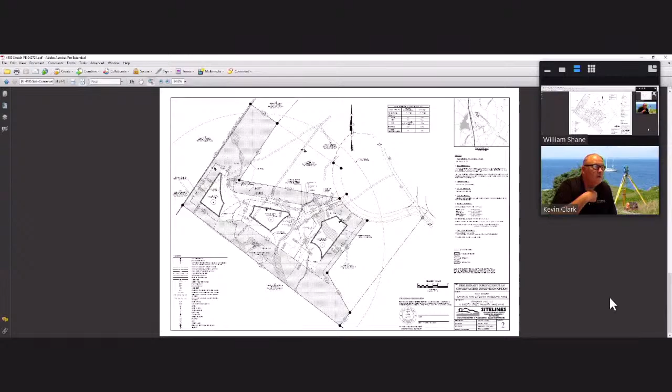Excuse me, is that going out over Channel 2? That's what I was just asking Christina. Hold on one second. Sure thing, use that screen for the person displaying at the podium, and we use this screen for Zoom. It is, but is it going out on Channel 2, not Zoom? It should be. Do you want me to try to turn that television on? Yeah, I think that's what Bill Shane does. Yeah, thank you for broadcasting.

Okay, thank you. All right then, so moving forward now, we prepared the conservation style subdivision plan for the next level with the revisions. As you can see, we added, in addition to the 75-foot buffer around the perimeter, open space around the perimeter that equals 6.39 acres of open space.

There would be 3 lots, which we had to modify so that they gain frontage on this private right-of-way coming off from Blanchard Road extension. We did submit road names, one of which has been approved, one was declined as being too close to another name, so we are resubmitting for another road name, and we'll have those straightened out before we go to final.

And when you say an agreement is in place, who is the agreement in place with? I believe there was some previous discussions with the town regarding that, and it was prior to my involvement in the property. I don't know the specifics, but I know that Mr. Ross is intending that he needs to do some improvements to the gravel portion of the road.

Hopefully at the preliminary we'll have more detail for everyone that lives there regarding the roads. But is it possible to get involved in discussing the actual standard? I mean, there's paved and there's gravel, and I think that's an important discussion to be a part of. I think at the next public hearing on this project, that would be the appropriate time. Okay, I believe so. Yeah, thank you.

I just wanted to add that if I'm understanding the situation correctly, the road you're concerned about is not the actual subdivision road. It's a road leading to where the subdivision road comes off, which is what Chase owns. So the planning board, I don't think is really going to have authority to look at that, but I would be very willing, especially since Kevin talked about an agreement with the town, to have the town manager and you and I sit down — it sounds like it's a town issue. If it's a private road, what are the deficiencies, and what, if anything, can the town do to remedy them? And if there's been an agreement between the owner of the subdivision and other people who have this concern, that will happen too.

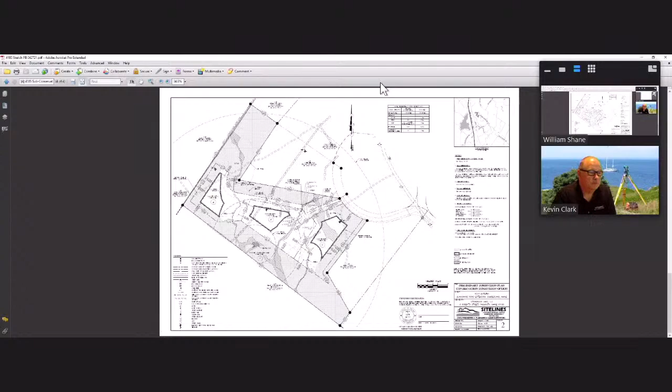If I could, on the road issue as well — at the last meeting, there was a question of whether the existing association would be responsible for the new private roadway. My understanding is that the maintenance of the road associated with this project would not fall under that; although these lot owners would need to be a member of that association, there would have to be an additional road maintenance agreement in place for these three lots that does not fall on the other lot owners along the Blanchard Road extension. Okay, thank you.

Anyone else in the room? The public hearing's still open. So currently there's nobody in the queue, correct? Currently, no hands raised. Okay, we'll wait just a short while longer. Again, if somebody at home wants to make a comment, please do it now before we close the public hearing.

Okay, I think at this time I will close the public hearing and bring it back to the board. Are there additional comments or questions?

Josh: I was looking at this for the next subdivision review. Ordinance 25037G states walkways shall be provided along all roads within a proposed subdivision.

I don't know if that road is within the subdivision or not. So while you're talking about roads, that may be something we need clarity on. It's there to serve that subdivision, but I don't know if it's actually within it—it may be an easement across the owner's other property. The rest of the roads are driveways, which wouldn't be subject to that standard. I'm not sure if that standard would apply.

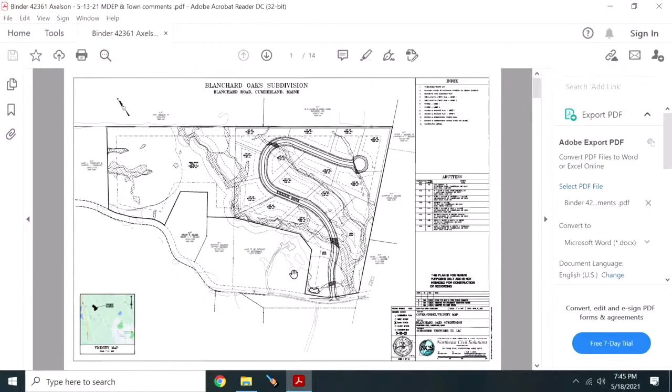So what we're looking at is 13 house lots that would be private. They are on wells and septics. Electricity obviously is going to be buried.

We're looking at a minimal impact of wetland crossings. There's one right here, and then one up in this particular area. These are just wetland swales in here. This is actually classified as a stream right through this area, and then it comes down into the Stone Gate and toward the West Branch areas that are on the other side of Blanchard Road. We have the requisite buffers and setbacks, so we're not going anywhere near those. Gorrill Palmer did the reviewing for us, and they came up with a list of criteria.

You probably have that list before you. We have addressed all of those criteria, and the town has the revised plan set, so they'll certainly be able to take a look at that for the final. We've been able to address every item in there. Some were simply comments, others were suggestions, and obviously we'll open that up when we get to the board's comments. I'd be happy to address anything toward that end.

The waivers we are looking at would be for identification of trees over 10-inch caliper. This 40-plus acre site is fairly wooded -- I wouldn't call it old growth necessarily, but it has not been developed, so there are quite a number of forested areas in there. We'd like to keep those as much as possible, particularly in the conservation open space area that would be with the homeowners association. We'd rather not have to identify all those trees, because there's literally a veritable forest of trees in that area. The high-intensity soils maps and boundaries, we'd like a waiver of that as well.

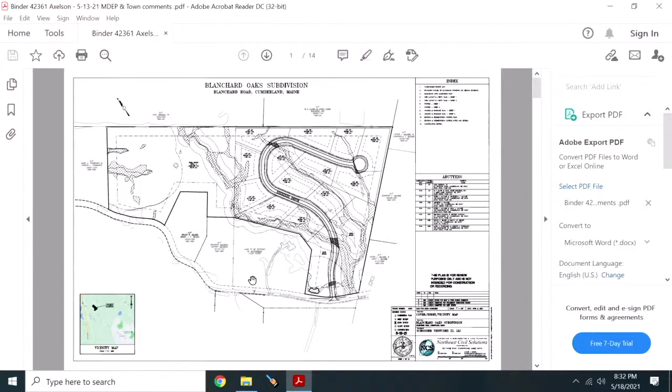Okay, thank you Jim. Josh, do you have road detail in the plan? Is there a road detail in the plan? Yes, in the plan set. Do you know off the top of your head what the width of the road is, and do you have shoulders? Yes, I believe it's 20 feet with 2-foot shoulders.

On both sides or one? I thought it was 22 feet. It's 20 feet of paved road with 2 feet of gravel shoulder on both sides, so a total of 4 feet of gravel. It is actually in here.

So it sounds to me, and this is not just for planning purposes, that we're pretty evenly divided. I certainly could go either way, especially now hearing the width and the shoulders. I know a number of subdivisions - I have a daughter who lives in a subdivision on Autumn Ridge that has sidewalks, but they're not plowed in the winter, and there's a lot of work because of the gully next to them. West Branch, partway maybe, so it's pretty heterogeneous, it seems.

So I guess, from your perspective, would you want to see a vote tonight on that for design purposes, or would you just as soon go to the final? That's a loaded question, I know it is. Because that's kind of why I brought it up in the first place, to see where we are as a board. Again, it sounds to me like it would be 4-3 not needing it, but I'm not sure, it might even be 5-2.

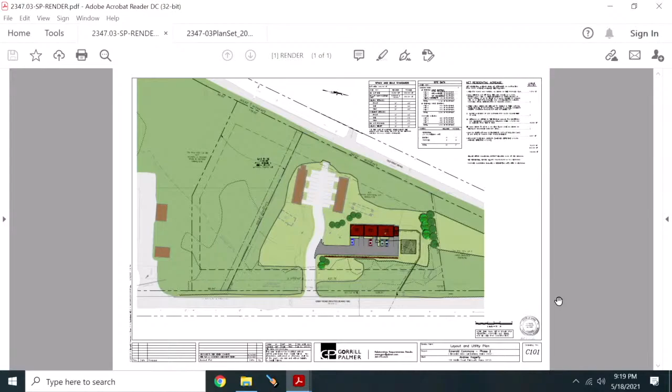I would, if this is okay with... could you, thanks, Dan. It's worked out well both times. We should have engineers all the time. Al and I are going to get some banjos, and we'll just keep playing back and forth.

No, I did get a chance to review the letter from Al that was submitted on Friday afternoon with his comment response, and everything he responded to was acceptable in my mind. And when it comes to the waiver for the high intensity soil survey, we would support that given the low density of development out here.

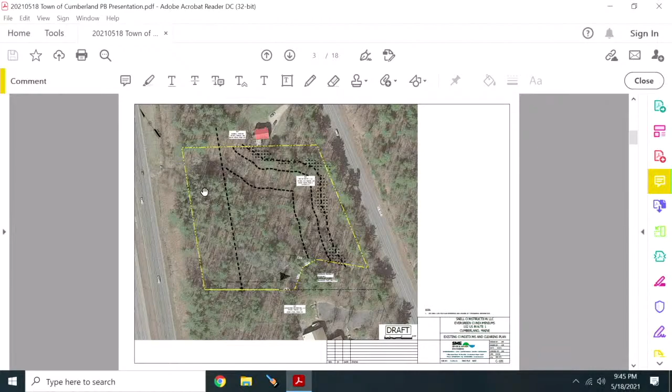We also have a 30-foot elevation drop from right around here to the beautification strip, which is a real challenge - we'll get into that in more detail later in the process. Anyway, it's a 5-story, 50-unit condominium building. We're going to meet that 50-foot height requirement - we'll be like 49 feet, 6 inches or so, right under it, we promise. We're still refining that, but we're very close.

There's a 20-foot wide paved driveway off of Route 1. With the 50 units, we expect a peak hour increase of 30 trips per hour, which doesn't trigger a traffic movement permit or significant review through DOT. We are going through that process with them now to make sure we get their review on a driveway entrance permit.

The requirement in this zone for parking is 1.5 per unit, which would put us at 75 parking spaces. But we met with the town, and the developer has a real interest in providing as close to 2 spaces per unit as we can get. It sounded like that was something the town would support as well, so you'll see in our plan that we provided that.

For public utilities from Route 1, we're lucky to have public sewer - the town just extended that public sewer down to Ledgeview Assisted Living a couple years ago, so we can connect into that by running a couple hundred-foot connection along Route 1. We'll also have public water available - there's a 20-inch water main out there on Route 1, which is pretty easy.

We're talking with the natural gas folks at Summit to see if they have a line in the area and if we can access that - we have a meeting tomorrow to talk through it. And then, of course, CMP. We met with the fire chief yesterday to talk about access to the site. He was very helpful and had some very specific requirements for getting a ladder truck down to the rear of the building. So here's a snapshot of our development.

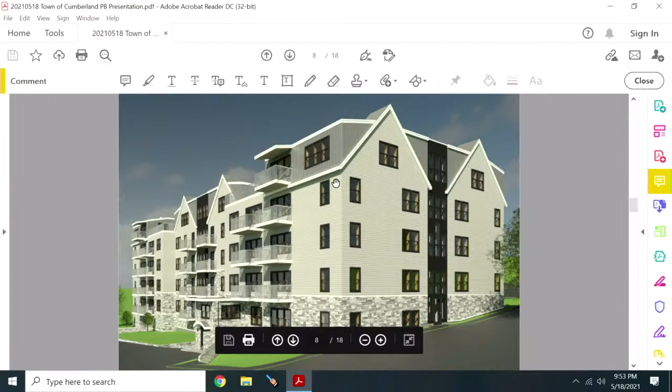Using the design guidelines as our guide through our refinement process, let's try to swing around the side. So here's our underground parking.

When we present again, we'll have integrated lighting and photometrics to share, how we're going to accentuate these entries, help with wayfinding, and help folks safely negotiate the site. We talked about integrating open space pathways so there could be connectivity throughout the site, so if you wanted to do a local walk, you could around the building. There isn't any connectivity along Route 1, but we thought that might be a nice add.

And then here's the Route 1 facade, as it were, but as you would see it, obscured by 100 feet of trees. So it's going to be hard to really see a lot of this facade at one time.

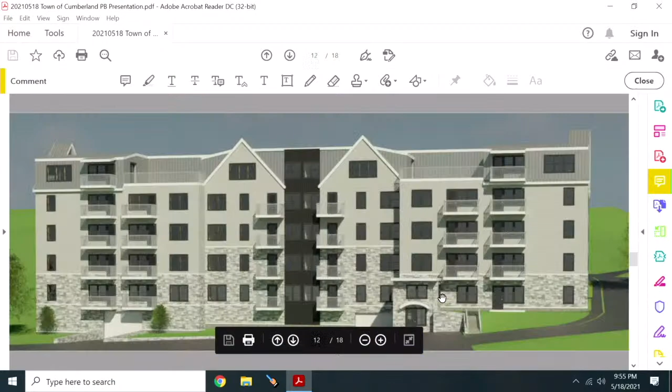So that was our effort, to bring these smaller scale design elements to break up these larger facades. It adds to personalization of the units, and helps integrate this, which is a really tough site. That parking level is a real help with the project.

The last slide I'd like to finish with is this one. This is the entry, the money shot. This is our visitor parking, our front entrance, indicated by the entry here.

The various roof forms and orientation were consciously shifted to face the street and all these different areas. There really isn't a back to this building, so we tried to accommodate all the various frontages around. That's kind of a consequence of tucking the parking around the back and under, but I think that's a really awesome thing that's embedded in the design standards that this site seemed to couch well.

So I think with that, I'll stop. Thank you. Questions?

Dan, what's your expectation on when you would be back to the board with the next step? We plan to submit next Tuesday with our application package, so we expect to see you June 15th, I think, is the next planning board meeting.

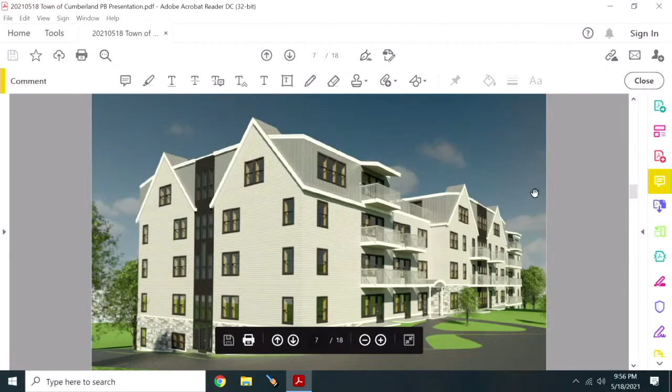Pending any major feedback tonight, of course. Looks like an incredible project. That's great feedback. All right, good.

Any questions or comments? Can you tell us about the typical unit, what it'll look like, square footage inside, and what's your plan for target resident there? It's a mix of 2-bedroom and 1-bedroom units, open floor plan, island kitchens.

Each one will have a terrace or porch of some kind. The rooftop units, there's 8 units at the rooftop that'll have an enlarged porch, and likely we're taking a look at maybe making those 3 bedrooms up there, to take advantage of some of the envelope that we have. So that'd be a mix of 1s, 2s, and 3s, which is a nice thing to do if you can. And then for parking, again, we're looking at that higher ratio.

As far as the interiors, every unit would have an upgraded, I wouldn't say lavish, but a luxury appointment—crown moldings, upscale cabinetry, wood floors, that sort of thing. It's a condo, envisioned as a condo type project, so I imagine there'd be some degree of customization within the interiors for clients' wishes, like clawfoot tubs and stuff like that, that can be accommodated within reason. And then the 2-bedrooms and 3-bedrooms would bring in either a half bath or a full bath, depending.

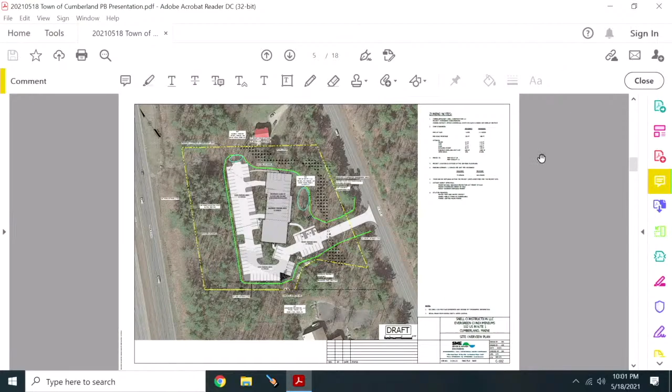Let me check with the town attorney. Okay, proceed. All right, well, thank you all so much for your time tonight, and we'll see you very soon. Thank you, and best of luck with it.

The next item is a public hearing, and it's a recommendation to the town council on an amendment to section 250, subdivision of land: first, section 250-3 definitions, to add a definition of sketch plan review; and second, section 250-7A, to remove a requirement for the sketch plan step from the major subdivision review process when a planning board workshop, as per section 250-14B, has been held.

Carla, do you have a plan on this? I think the memo that I dated April 5th, that's in your packet, really outlines the need for this amendment change. And you've experienced it this month and last month when we had to go through the same kind of review twice. So unless you have any questions, I think it's fairly self-explanatory.

Do we need to read the language, or not? Ann has something. Yeah, I have a question. Because I don't think - and I could be totally wrong here.